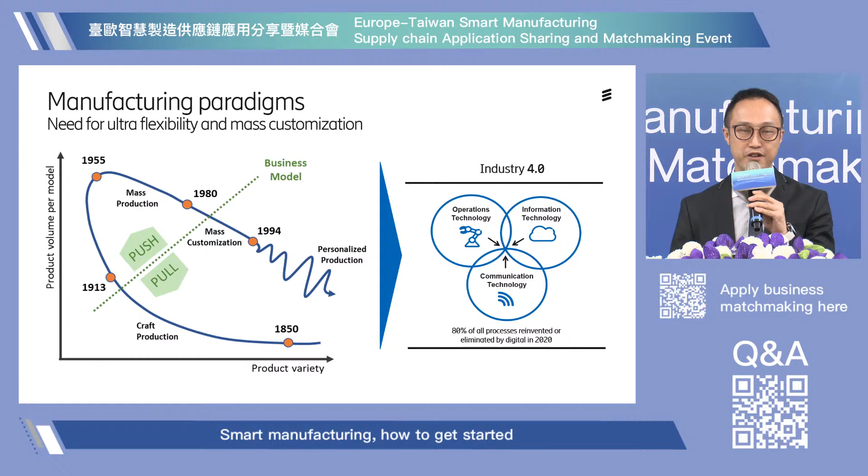And it's because there are a lot of applications in the factory that will embrace a more flexible way to deploy the solution or application. So wireless is the key.

And when we look into a lot of study within Ericsson, and also our experience with more than 60 references across the world, we find quite a number of applications that manufacturers will consider to use. We can categorize that into 5 different use cases that manufacturers are most interested in.

First of all is asset tracking, which the factory would like to use to track, for example, their material, their partially completed products, and also the finished product - where they go and how is the performance. Because when they know about the performance of the network, they know how to improve it.

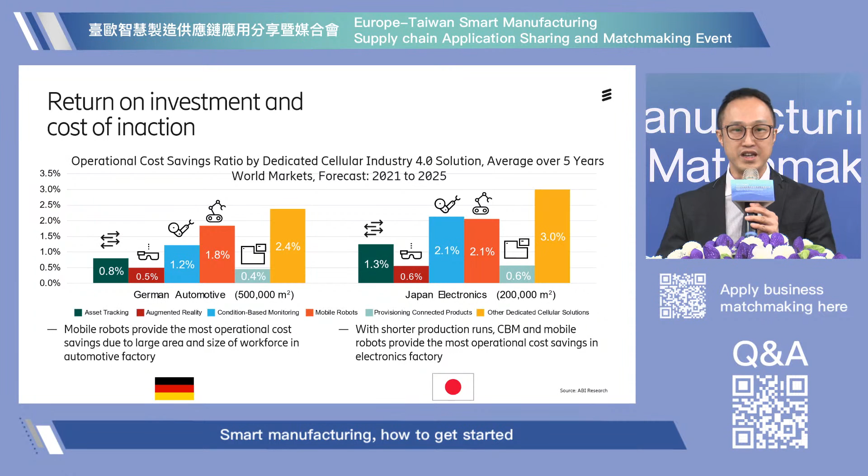In this chart, we can see the similarities and the differences. Of course, the numbers are different, but the similarity is in which applications generate the most savings in the factory. You can see robotics and condition-based monitoring generate the most savings over those 5 years of operation. Let's go into more detail on the calculation.

When you look at the investment part, the total cost of ownership for the cellular investment is around 50 million US dollars. But it generates more than 500 million US dollars in savings over those 5 years, so it will increase the margin by 4.58%. We can also compare with doing nothing. If they do nothing, over those 5 years it will impact 17,500 vehicles, and it will generate a 495 million loss in their factory.

When you look at the Japan case, you can find a similar situation. They invest 26 million US dollars in the cellular system, and they generate more than $600 million in savings. If they don't do it, they will lose $636 million over 5 years. It improved the margin from 15% to 22%. It's just a huge improvement.

When we look at the ROI for these two companies in 5 years, we can see almost 10 times to 20 times over 5 years. So actually, they have a lot of similarity.

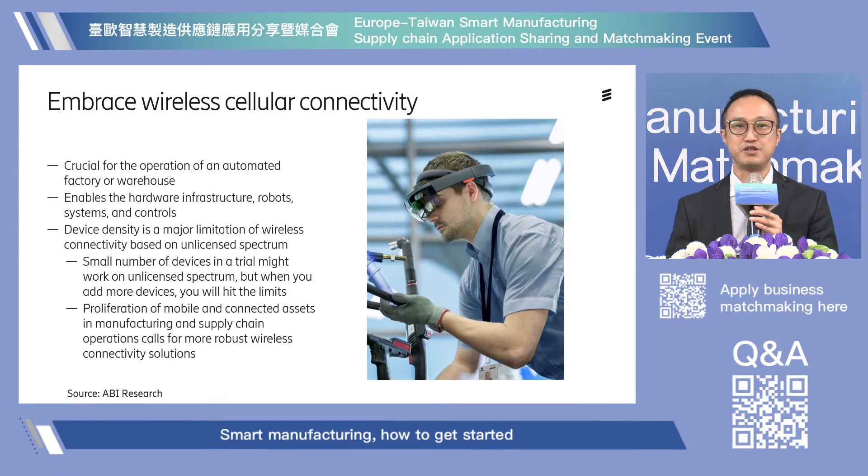A cellular system is born with security, with massive connectivity, and with very stable performance and handover, for example in mobility management. These are all major factors that help the factory operate better and reduce losses from interference and attacks from outside hackers. And of course, the mobile network uses licensed spectrum, unlike other technologies that use unlicensed spectrum, so we are free from interference from others. That's why the mobile network, or the cellular solution, is the key.

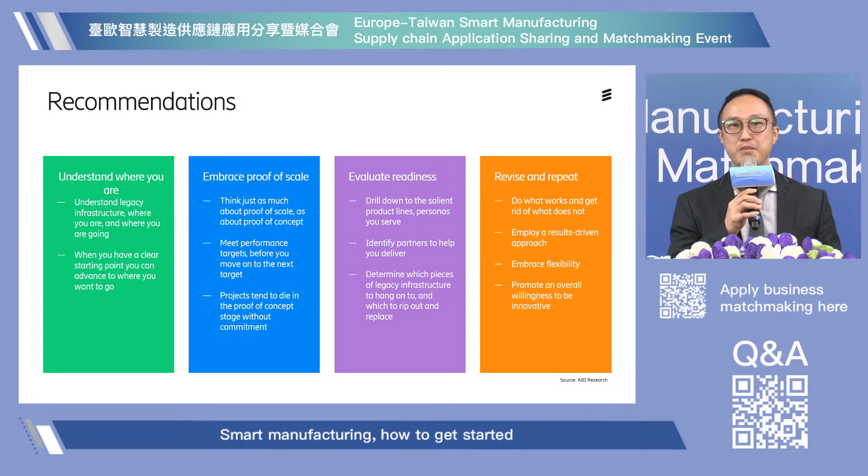And finally, you have to evaluate, are you ready for that? For example, maybe some of the equipment is too old and you have to replace it, then you need a plan to replace it. And maybe some of the work processes are too old, then you may need to educate your staff to see if there is anything to change, to adapt to the new changes. Finally, be more flexible, review it progressively to find out the best way of using those technologies to help your process.

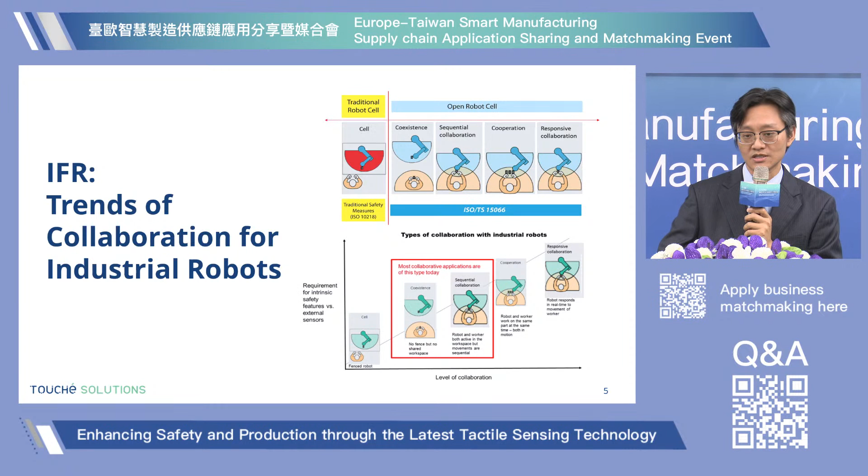So when we talk about safety from the ISO standard point of view, in ISO 10218 and ISO/TS 15066, there are 4 standard modes for the human-robot collaboration scenario: the safety-rated stop, the speed and separation monitoring feature, the hand guiding feature, and the power and force limiting feature.

But if you look at all 4 kinds of co-work scenarios, from coexistence to collaboration, the most essential safeguarding feature still remains contact and collision protection, which means the power and force limiting function is still the critical one. So what is power and force limiting?

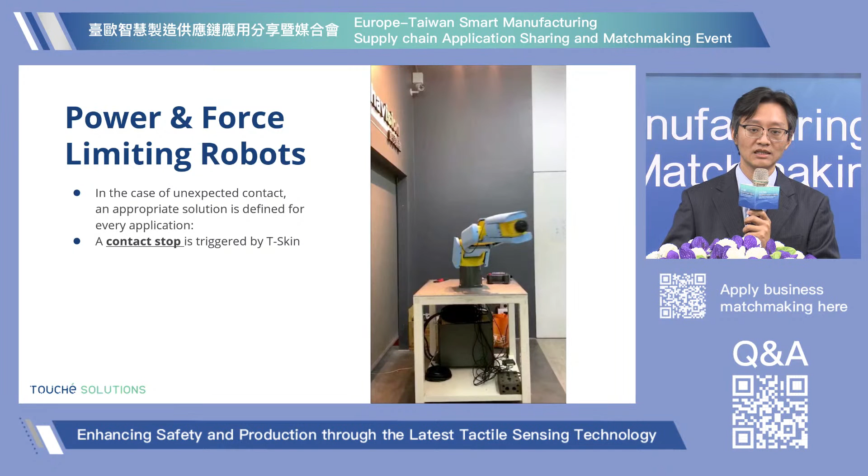Let me check the video. Does it work? Okay.

In the case of unexpected contact, a proper protection sensing solution can make the contact safe and not hurt people. So it can be triggered by Touché Solutions' T-Skin. As you can see, the skin is very sensitive and very reliable.

Sorry, I did not. Okay.

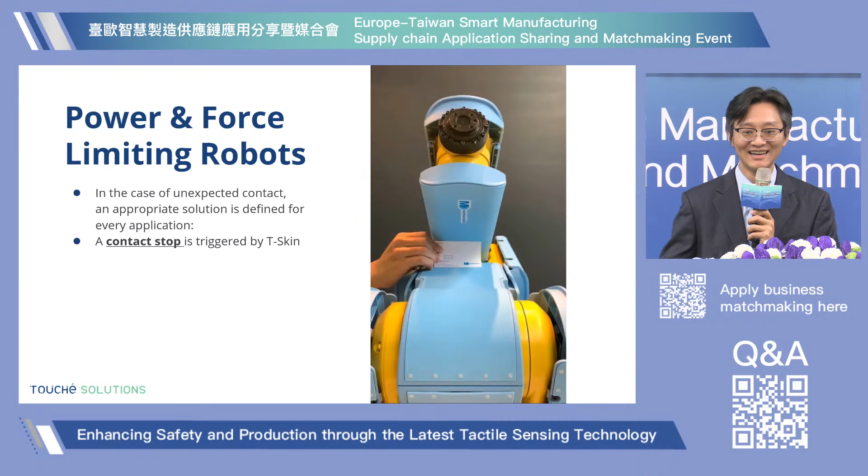Okay. If we combine it with other area sensor solutions to provide the reduced robot speed function, then the robot can change its working speed from high speed to safety speed, and it can reduce the risk of injuries.

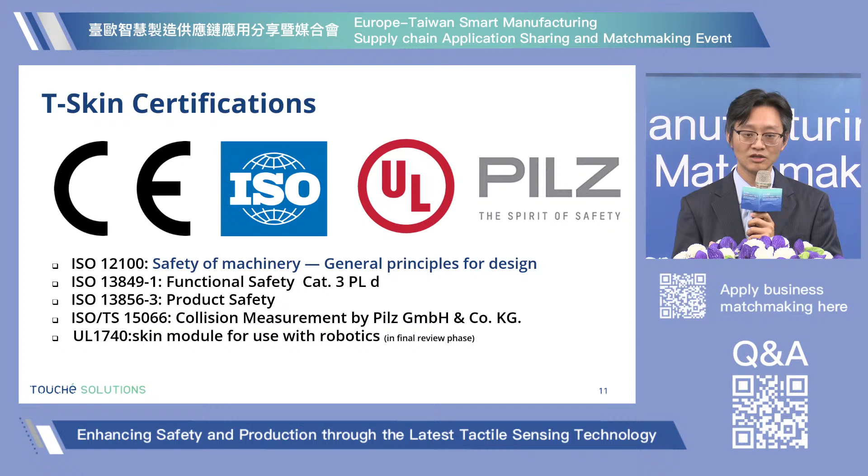Okay, here is a brief movie about the collision measurement. We co-work with Pilz to provide the collision measurement report, and here is how it tests. All the collisions will be checked and verified, the force and the pressure of each collision. So all the robot performance with the T-skin can be guaranteed.

The collision force is far under the limitation of the ISO 15066 requirement. Okay, so it can make sure all contact or all collisions are safe for humans.

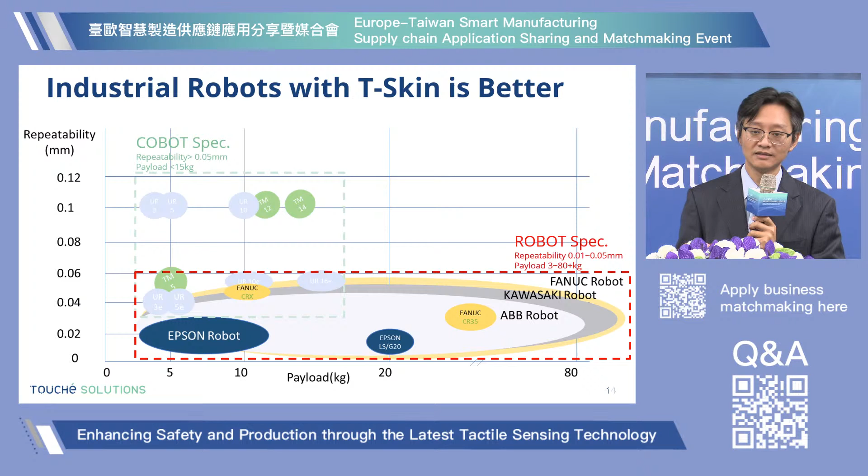Okay, then when we come back to current cobot specs, we can find from the repeatability and payload point of view, only a few cobots can provide this function. But compared to that, existing industrial robots have a higher payload and more accurate repeatability. So we think industrial robots with T-skin can provide more application benefit for automation. Okay, so from this point of view, the industrial cobot can become like this.

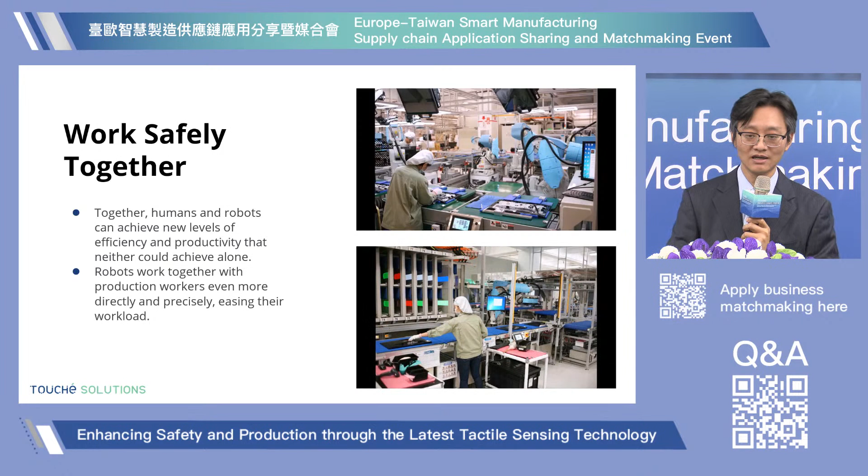Okay. For example, the robot will take the repetitive task, and all the contact scenarios are protected by our blue T-skin. And in the next video, okay, if you get closer, the robot can reduce its speed. In case of contact, the robot will stop immediately. So it provides a safe working-together environment. Okay.

Let's move to the next page. Okay. Through this kind of combination, I think we can simplify the layout of the current production line from conventional safety precautions to an open environment. So the space saving will be up to 50% or even more, and the layout can reduce the cost required by cages or other fences. Okay, and without the fences, the layout of the robot and the human can become more flexible. So flexibility of automation will become more and more important in the post-COVID-19 era.

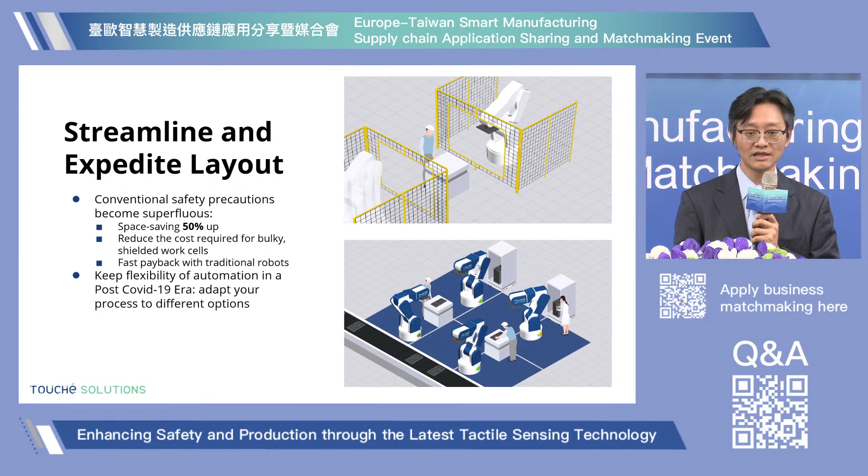So I think with this safety feature, the robot, the automation equipment and the worker can be safely laid out in the same space. Okay. Let's move to the next.

Meanwhile, without the fence, an open environment can run smoothly for the robot cycle time. This is a comparison between a fenced and a fenceless operation. You can see from the middle video, inside the fence, the robots are limited in their motion trajectory. So the cycle time will take about 2.9 seconds.

But with the fenceless environment, the robot can do the joint motion. So the cycle time will reduce to 1.2 seconds. So it will increase the productivity up to 60 percent. Okay. Sorry for the video, it doesn't work. Okay. Let's move to the next page.

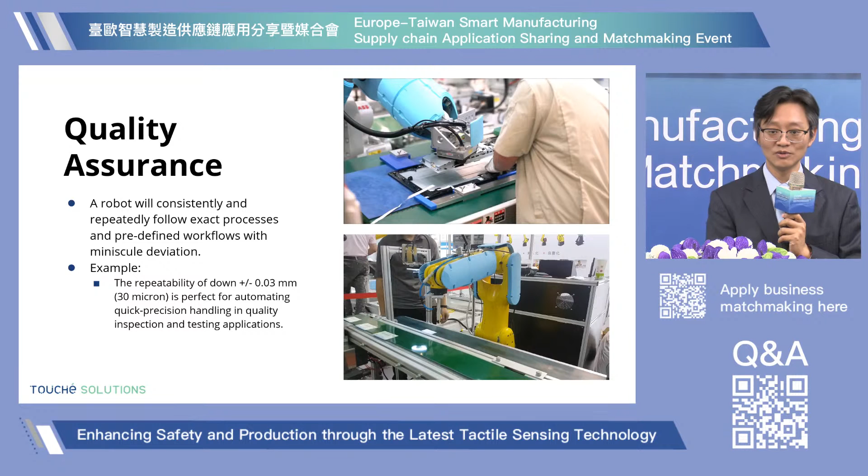Okay. Because we upgraded the industrial robots, the industrial robot can provide quality assurance. So for example, for the pick and place application, the traditional industrial robot can provide 0.03 millimeter accuracy, which is very precise and great for real automation applications. Okay, let's move to the next page. Okay, sorry.

Okay. Also, industrial robots have longer reach and higher payload. So for loading and unloading tasks, the robot can create a healthier workstation, good for humans. For example, for overhead work or repetitive heavy tasks, the robot can take the task, and the worker can check and verify separately.

So in Kista's real case, they reduced from 2 human operators to an HRC scenario. One operator co-works with one industrial robot, and the productivity increased about 55%, and it also saves up to 43% of space. Okay, so

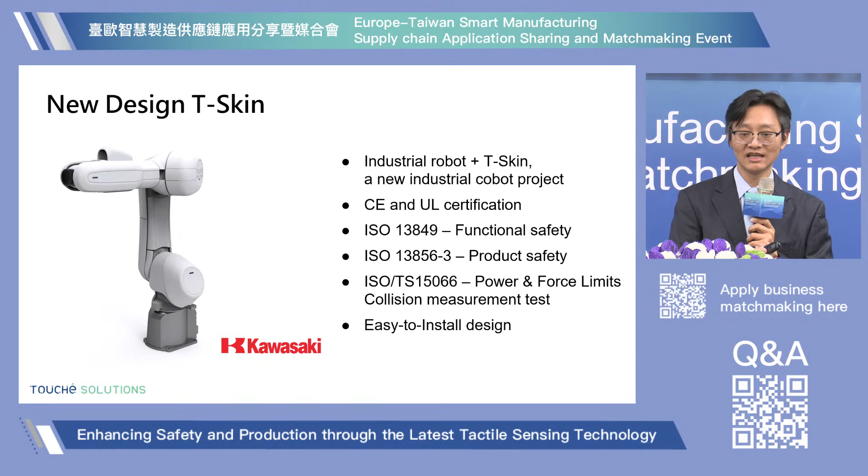in the next page, I would like to introduce our new concept of T-skin. It co-works with Kawasaki robots. We have full coverage and a lightweight design for their industrial robot. It can cover the contact area from different angles and all the hazard positions. We also got all the certifications, and this new design will be launched at the end of this year. It will go worldwide very soon.

Okay, now we have a lot of great partners from ABB to Denso, Epson, Fanuc, Kawasaki, Kuka, Mitsubishi, and Yamaha. And that's all my presentation here today.

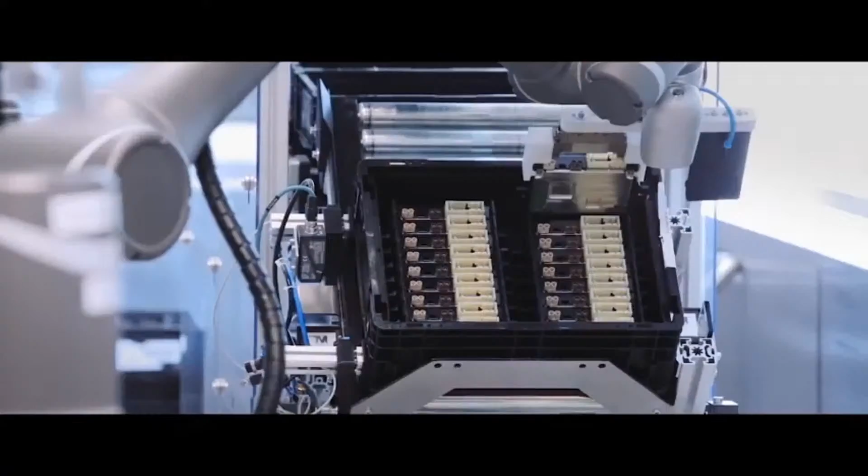In the video, you may see some little squares, like this one, and we call it the TM Landmark. It's a major trick of our robot. In the old way to teach a robot, you record all the points the robot should go to in robot space, in a robot coordinate system. So if the spatial relationship between the robot and your environment changes, you need to reteach all the points again.

But if you use this TM Landmark and use our camera to see this landmark, it creates a virtual coordinate system on the landmark. And then you can record all the points on this landmark. It means even if your robot and the working space changed, someone moved it, you just use the camera to watch this TM Landmark again. All the points are updated. You don't need to reteach it.

This is a testing station on this production line. The robot picks one electronic device and puts it into each testing machine. Let's give you an example.

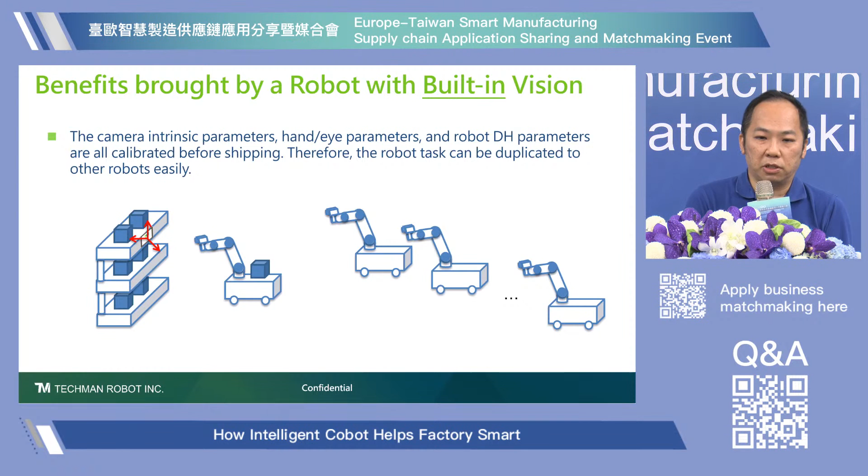In the past, our customers used our robot for pick and place, for loading and unloading, for assembly. But more and more customers are asking us, can we use TechMan robot for quality control, for inspection? Because our robot has a camera, and the robot can carry the camera to check the product from different views.

So of course we can do quality control, but with old machine vision technology, to do quality control you need to set up a lot of rules to define what's okay and what's NG. When the rules get more and more, the task gets complex.

But AI technology has made great improvement in recent years, especially deep learning technology. You can use AI for classification, for object detection, for segmentation to find tiny defects, or even if you don't have any NG sample, just use OK samples to train a model and use it to find anomalies.

So TechMan, this year, just released our AI solution. We have new software and hardware. You can build your own AI training server in your factory.

You don't need to send your image to the cloud because it may leak some important information about your factory. You can just use our solution, and our solution has a very friendly user interface.

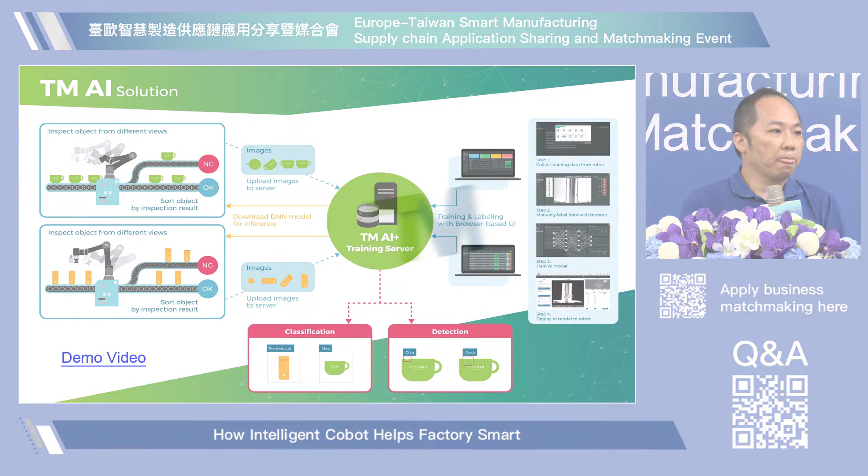In recent years, AI technique has shown great improvement on robotics vision. However, AI is task-oriented and data-driven technology that requires the use of a computer to model and replicate intelligent behavior. Users need an easy-to-use tool to train and deploy their own AI model using their own dataset in order to solve tasks.

Hi, I am Jesse Wu, the factory manager of Techman Robot. In recent equipment updates, we applied TM AI Plus into our TM robot production process in the control box wire assembly station.

Before we introduced TM AI Plus, all wires were assembled by human workers. Due to the difference between individuals, it's hard to standardize the assembly process, and this generated occasional assembly errors, which might cause damage to the power supply of the control box and create extra costs.

The TM AI Plus solution contains a physical server installed with TM AI Plus training software and TM AI Plus inference functions performed by a robot controller.

Users can build and train an AI model and deploy the model to robot arms. It's an end-to-end solution that integrates everything to minimize user effort. Let's take a closer look at how this solution works.

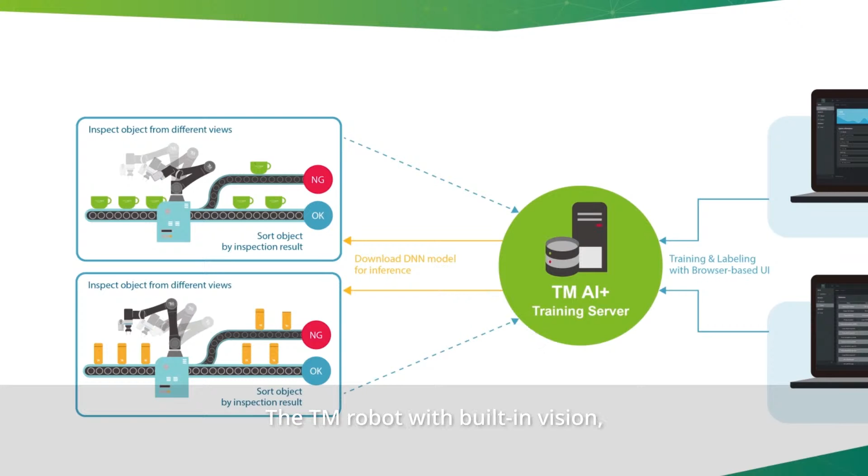The TM robot with built-in vision can automatically collect image data while working. These images will be used as a sample dataset and then uploaded to the TM AI Plus training server. TM AI Plus training server is a browser-based software which allows multiple users access at the same time. Users can process and label the image samples collected from the robots.

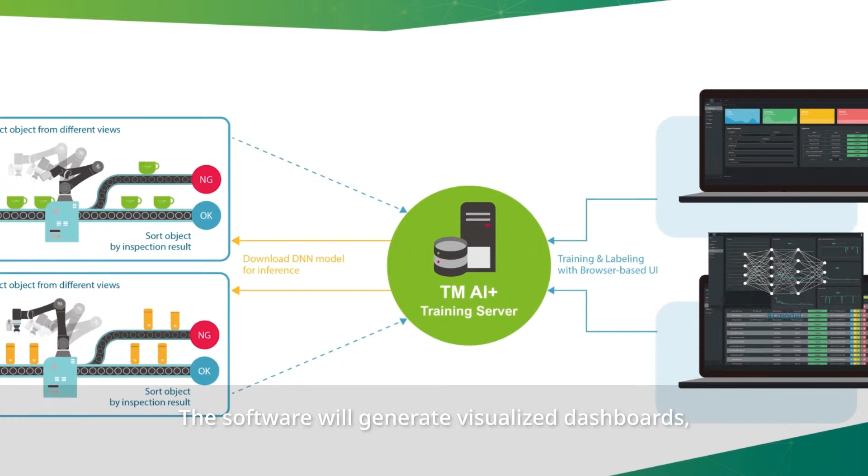After labeling the samples, AI models will be trained using these samples. The software will generate visualized dashboards and provide simulation functions for users to evaluate the training results and see if they meet their expectations. Once expectations are met, users can download the trained models to the robot and perform inference in the tasks.

Now the robot arms are capable of performing tasks such as object classification and object detection. With different labels being assigned to the image data, the AI model will be trained according to these labels and enable the robot arm to perform object classification.

Detection function is highly recommended for quality inspecting. It can be used to detect defects appearing on products. It can also be used in OCR applications.

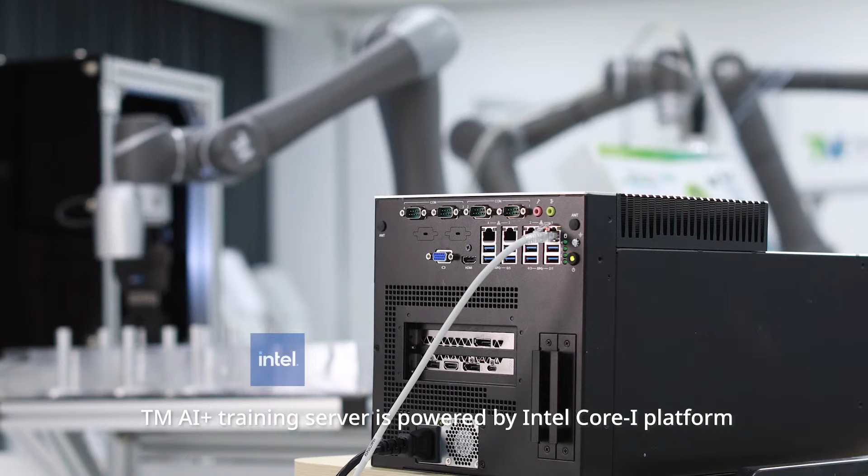TM AI Plus training server is powered by Intel Core i platform and leverages Intel Edge Insights for Industrial software to facilitate training work and optimize user experience. The robot arm is powered by the Intel Core i platform with the OpenVINO toolkit to optimize inference performance of the AI model as well as system cost structure.

An easy-to-use graphical interface guides users to perform image annotation and AI model training directly. The need for AI knowledge or skill is minimal. The dataset management view shows an image gallery for each label. All the images for annotation and training are organized with proper visualization.

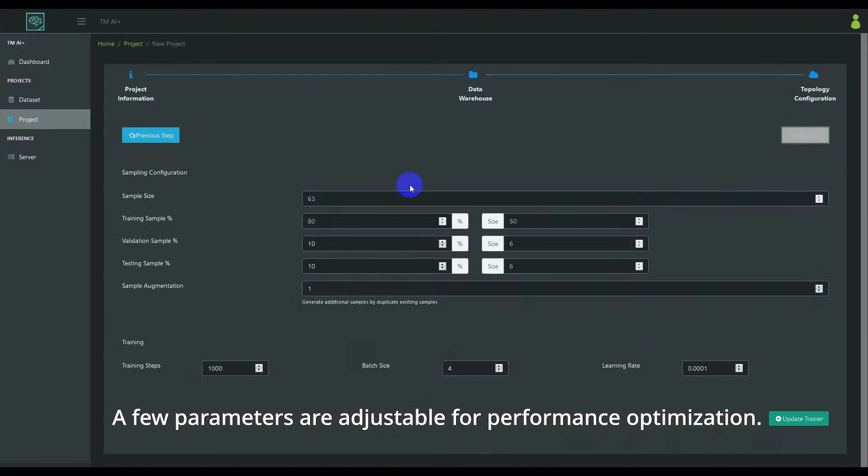Different AI models, such as classification or object detection, can be chosen to fit different applications. A few parameters are adjustable for performance optimization, and then just one click starts the whole training process. The training process usually takes a couple of minutes to a few hours.

When the training process is completed, the training trend and performance metrics such as precision, recall, and F1 score are visualized with a clear chart and table. It helps the user understand whether the dataset can be interpreted by the trained AI model.

The AI model can be tested on the images in the dataset or on new images uploaded by the browser. Clicking the thumbnail image to see the prediction result confirms the model works well with different images. Finally, all the robots connected to this training server can download this model and then start working with AI-powered visual function. TM AI Plus is a total solution from AI model training, deploying, to inferencing.

After introducing TM AI Plus, we let TM AI Plus handle the quality inspection task. It can 100% check all of the wires and alarm the workers if there's an error. While inspecting, it also automatically records the inspection data for each control box. Overall, it enhances the yield of the station and reduces costs that used to be generated from component damage.

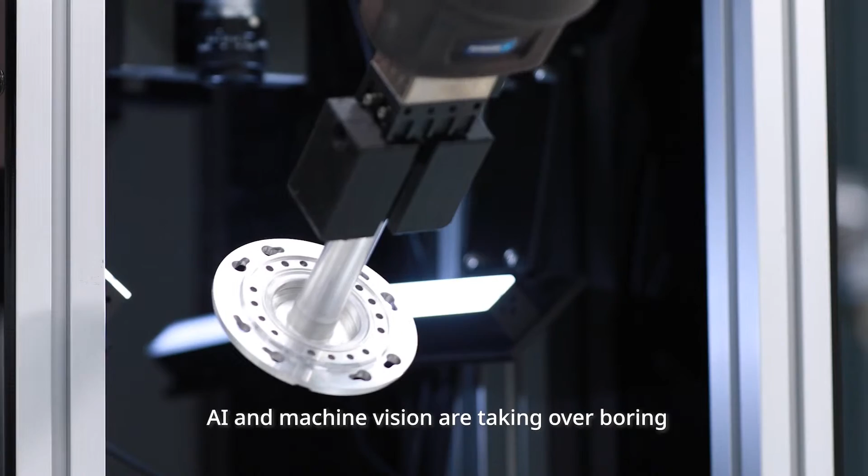AI and machine vision are taking over boring and complex tasks like inspections. TM AI Plus solution is the industry's first integration of traditional machine and advanced AI vision in a single robotic system.

This lets workers focus on more sophisticated tasks. Machine vision and deep learning will also be an integral part of Industry 4.0 as manufacturers look for new levels of efficiency and productivity.

Next, I will show you some examples of using the AI. First is the same case in the video you just saw, where we use AI to check if the wire is connected to the right pin for power supply.

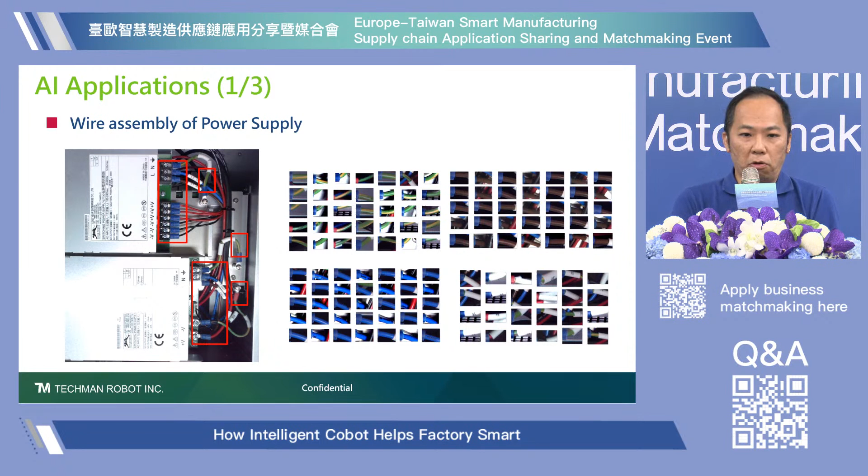Next, I want to use these slides to conclude today's talk. Techman Robot, we provide a total solution for your robot and your robot with vision.

All the software of the robot control and vision, including 2D vision or 3D vision, and even AI, are integrated in the same software and put them in the same controller.

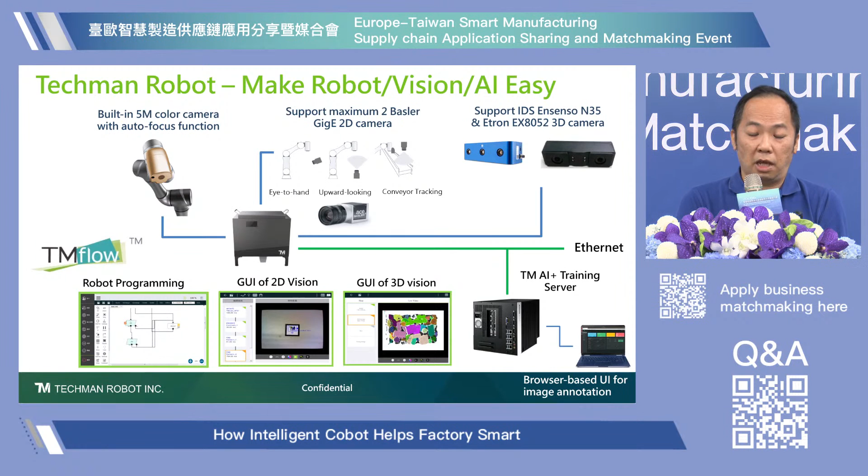So you don't need to worry about how to do the calibration, how to communicate between your robot and your vision solution, or how to apply AI to your system. All of them are integrated together with a very simple, easy to use software. We believe we reduce the learning curve of robot teaching and vision, and we can help you improve your performance and save time setting up an automation line.

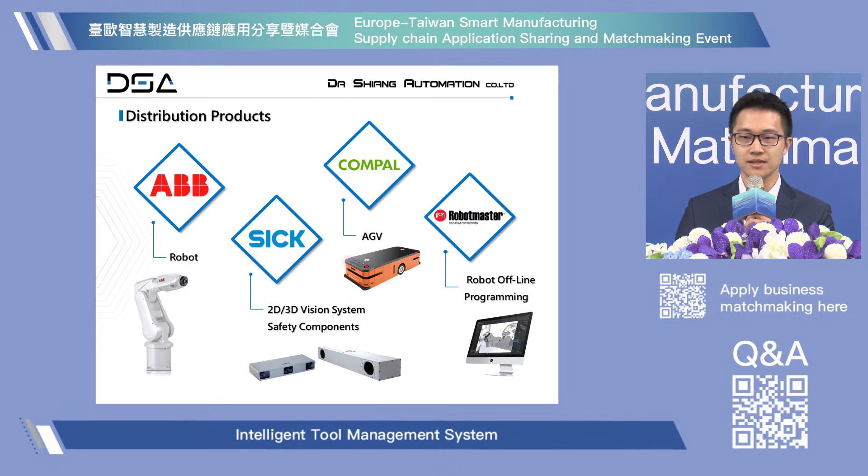You may be aware that Da Shiang Automation is one of the leaders in Taiwan when it comes to investment casting, die casting, and machine automation. Da Shiang Automation has formed close relationships with the following companies: ABB, who supplies robot arms; SICK, who provides 2D and 3D vision systems and safety components; Compal Electronics, that offers AGVs; and lastly, RobotMaster, who markets robot offline programming.

I want to further introduce Da Shiang Automation to all of you with the help of a video. The content in the video will be in Mandarin and English. Let's take a look.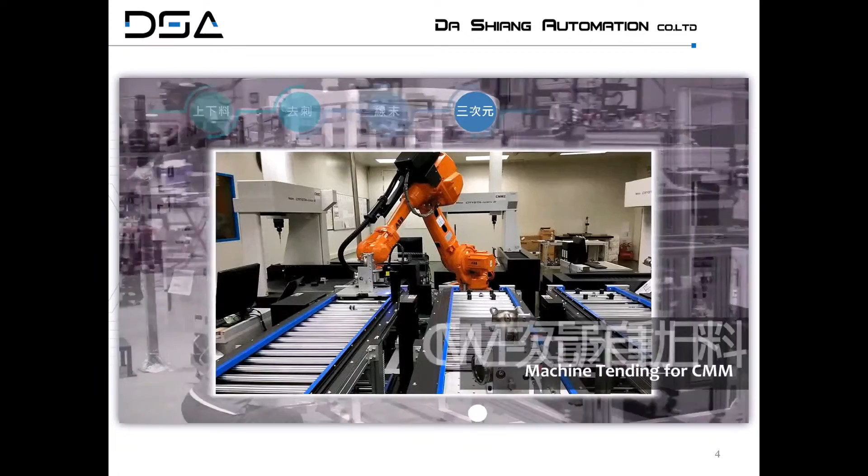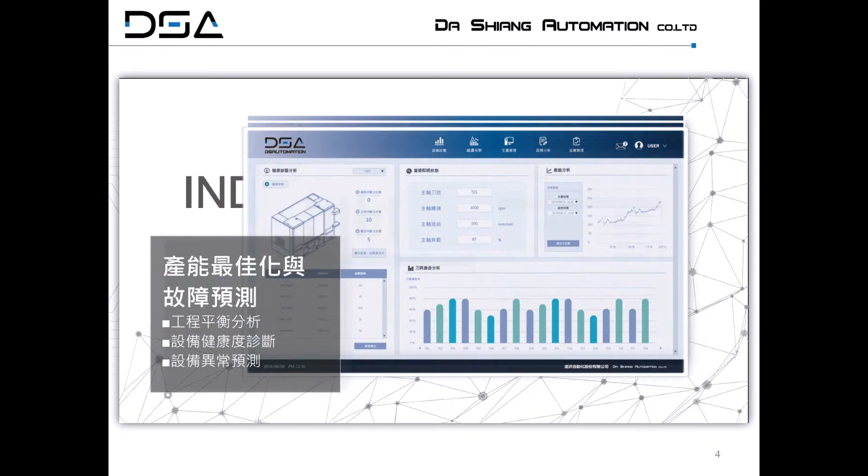We also provide a website user interface, like productivity quality management, energy efficiency optimizations, productivity optimizations and downtime predictions, downtime statistics and solving experience record, product scheduling optimizations, and information layer management.

Da Shiang Automation is Meida Group's subsidiary, and Da Shiang is located in Taiwan. We also have offices in Tianjin, China, Ho Chi Minh City in Vietnam, Serbia, and France.

Currently in the industry, everyone is talking about tool data management. How can we at Da Shiang Automation help your company process run more friendly? Let's watch how Da Shiang will make it possible for you. The following three videos will take about 7 minutes. The first video will explain why we need tool data management.

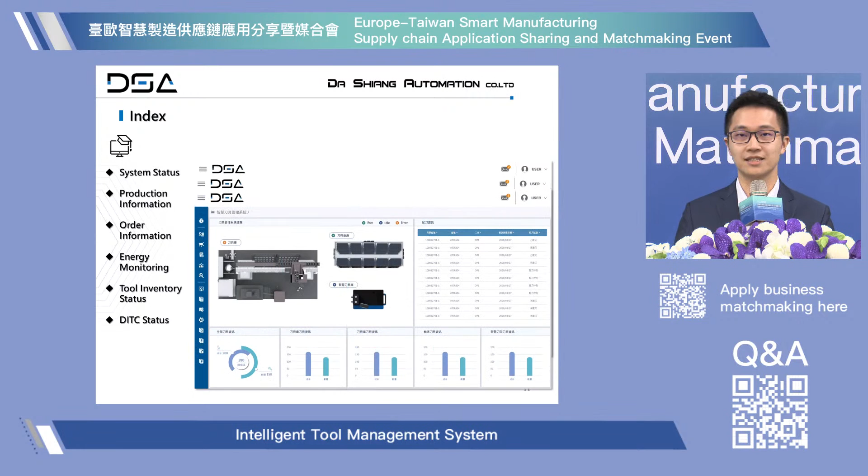The product includes a software user interface that provides the following details: system status, production information, order information, energy monitoring, tool inventory status, and DITC status. Some additional information that can be found in the system is tool warehouse status, DITC warehouse status, tool magazine status, and tool buffer rack status.

Also, Da Shiang uses a tool setter in the CNC machine for precise measurement. More functions include tool inventory status and tool searches. This is what tool configuration setup and machining tool configuration status, and DITC tool configuration status look like.

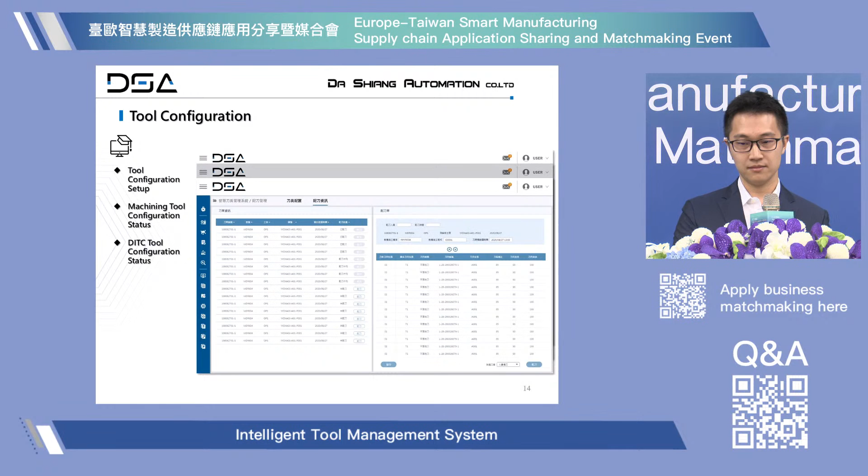Every company that invests in an ERP system, if they want to improve their performance, will also have to consider automation. So firstly, they will use SMB to collect data for the SCADA system to monitor and analyze the real-time information. The DSA Intelligent Tool Management System can be combined with the MES and APS system for improved performance and production line efficiency.

And looking at the smart manufacturing systems structure, automatic factories will have their data collected on each CNC machine via SMB, PLC, or DCS through Wi-Fi or Ethernet cable. The HA server will collect, analyze, and integrate available data. The HA server will also provide stability and control the on-set status of data. Users will be able to plan and control processes, and managers to obtain key information through real-time monitoring.

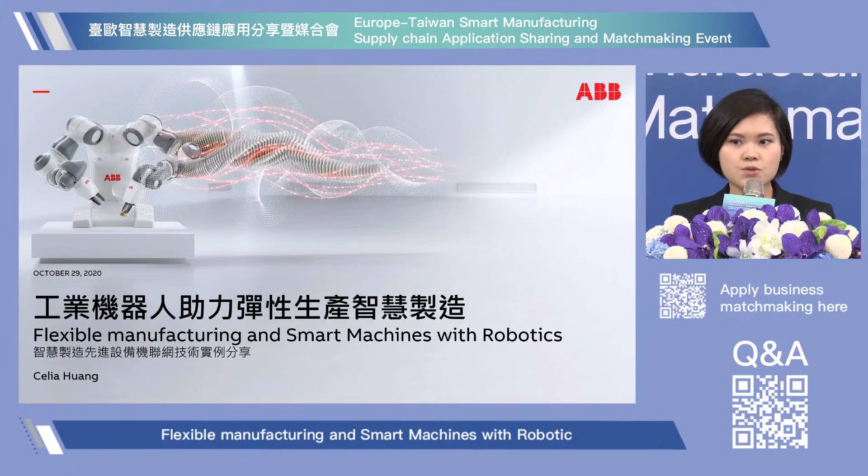Today's webinar will focus on some real cases to tell you how ABB robotics is applied to real manufacturing processes across industry. Before we start, I would like to share how we are helping our customers deal with opportunities and challenges.

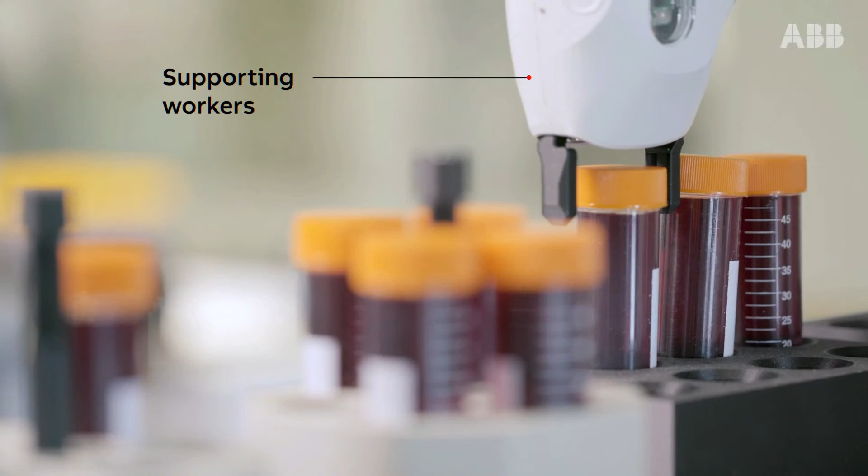For those who don't know who ABB is, ABB Group was established in 1988 by ASEA from Sweden and BBC from Switzerland, with headquarters in Zurich, Switzerland. ABB Robotics has over 30 years of experience in developing and deploying robotic solutions, wishing to assist manufacturers with flexible manufacturing and smart machines. In this video, you can see how we are helping customers deal with the opportunities. And you can see how YuMi is helping customers in the medical sector.

In the next slide, I will show you what makes ABB robotics different. At ABB Robotics, we push the boundaries of technology to energize and transform the industry in which we operate. We have seen an acceleration of 3 key megatrends that assist manufacturers with flexible manufacturing and smart machines. As you can see, simplification, collaboration, and digitalization are fundamentally changing the face of manufacturing and create a sustainable future. For that, ABB is launching something really exciting.

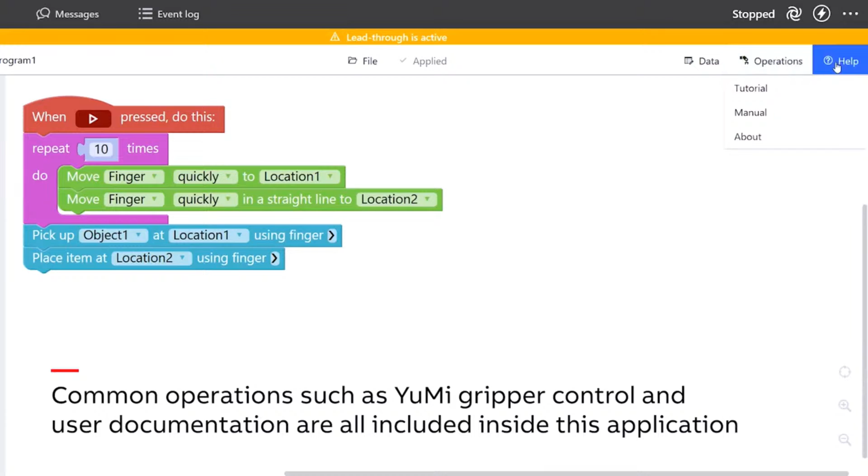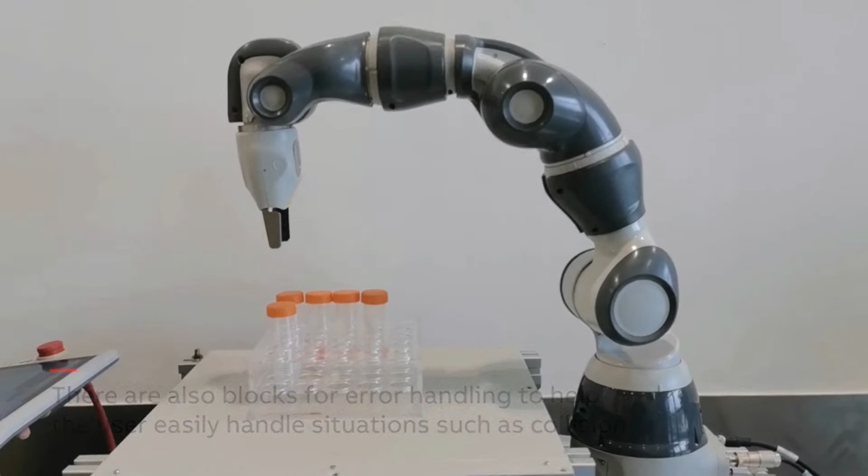Where automation is being introduced to assist manual-based processes in industry, there is always an additional need to keep personnel safe while maximizing the opportunities to collaborate. As you can see, this is how we focus on human-robot collaboration. YuMi helps to improve the overall application functionality, which is ideal for small part assembling and yet extremely accurate and safe. ABB SafeMove 2 performs the safety certified monitoring of the robot motion, tool, sensor supervision, as well as the speed limitation. It transforms any connected robot with higher payload and faster speed into a collaborative one. Moreover, it gains a high-performance touch system, enabling users to collaborate with the robot.

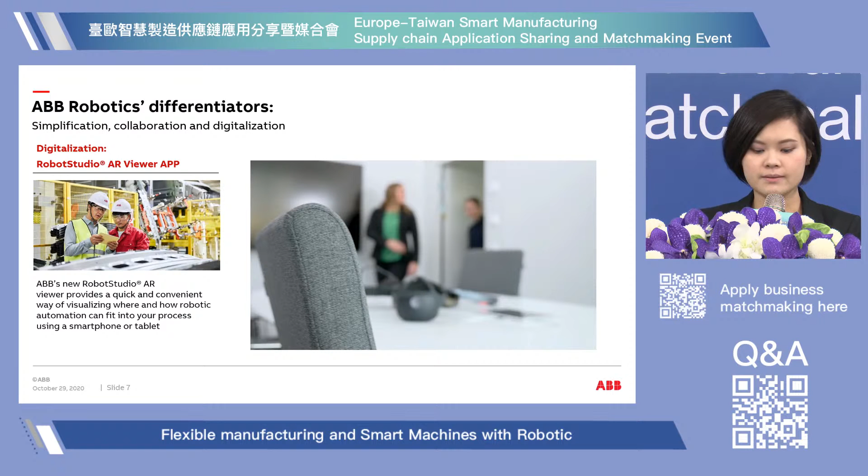Well, we've talked about simplification, collaboration, and digitalization. Would you already want to see how the robot is working in your environment? Now, let's imagine that you're in the office. ABB's RobotStudio AR Viewer app can test any robot created in RobotStudio, enabling users to get the size and scale of a robot or robot cells and how it can be deployed on the factory floor to fit around any existing equipment. With AR technologies, the app overlays the model solution in a real-life production environment with the ability to scale it to full size and rotate it through a variety of angles to achieve the best result.

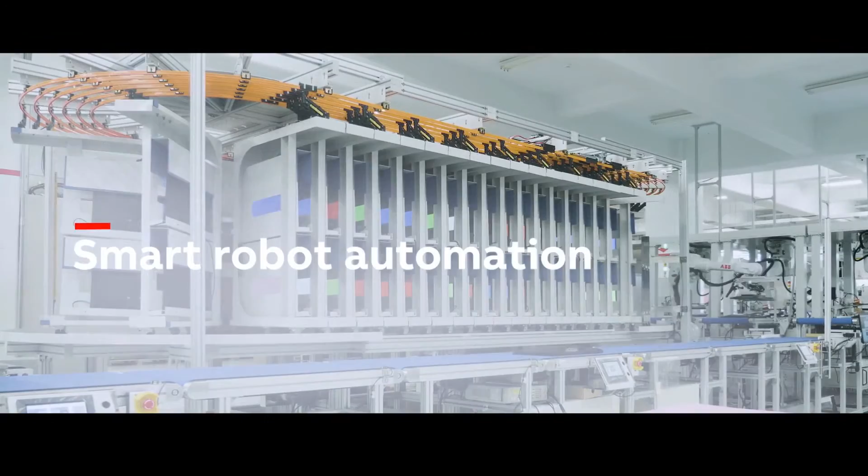Alright, it's time to show you some real cases. In this case, you'll see ABB cooperates with Qisda with robotic solutions for the production line. Our robots are working in assembling and testing lines with the workers. As a result of bringing ABB's robots on board, Qisda has reduced low-skill manual tasks by 51% and enhanced the management of manufacturing productivity by 74%. Occupational injury rates have been greatly reduced, and the production per unit area has boosted by 52%.

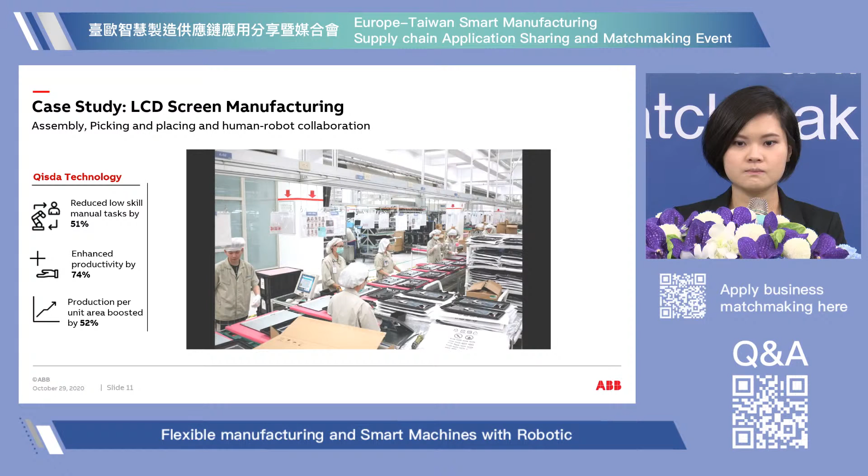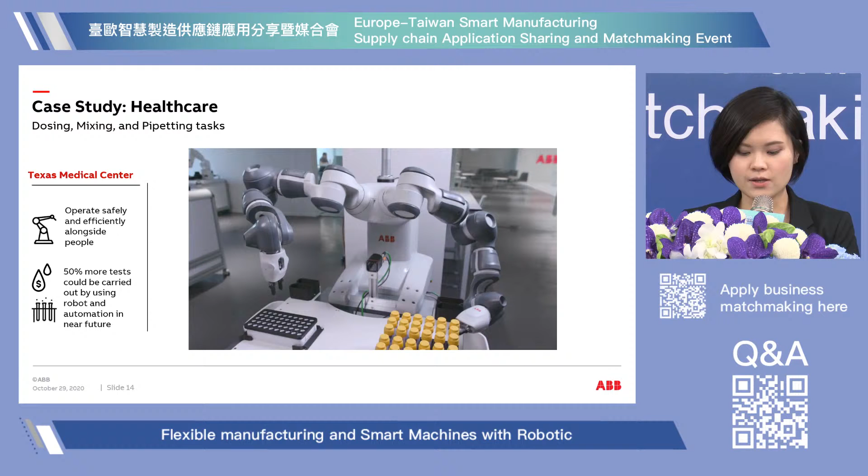And in the last case, you'll see ABB cooperates with Texas Medical Center to develop automatic healthcare solutions. We are jointly researching robots, automatic systems, labs, and pharmacies to drive technological innovation. All right, let's hear some voices from the customer.

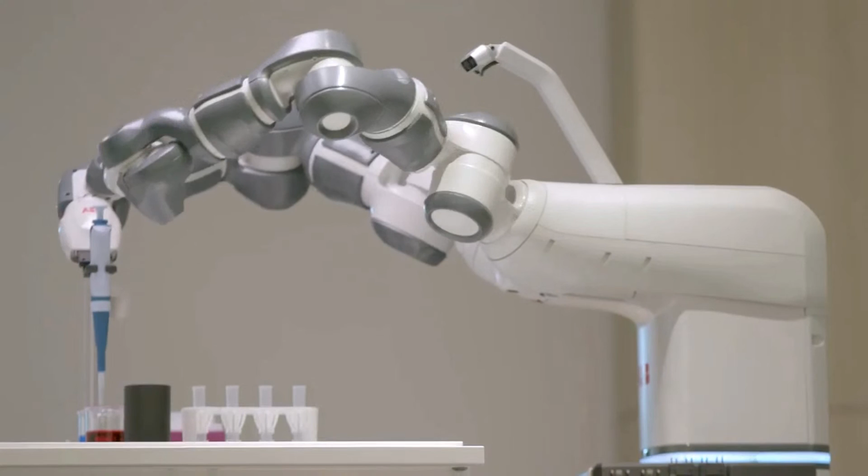The largest medical hub in the world just got even more state-of-the-art. The Texas Medical Center in Houston treats 10 million patients a year and is at the forefront of life science innovation. And now it's also home to ABB's first global healthcare research hub, bringing the power of robotics and automation to medicine. Together with ABB, we envisioned a whole new world where we could use robotics as the core for our innovation in our labs, in the way that our hospitals work, in the logistics, in the way that we refine the processes in healthcare. Healthcare's changing dramatically. We have shortages of people, we have shortages of talent, and ABB Robotics is bringing that technology and putting it right at the center of all the innovation at the medical center. Among the concepts being demonstrated here are collaborative robots which can work with centrifuges, in test tube handling, and even navigate autonomously around the labs and among their human co-workers.

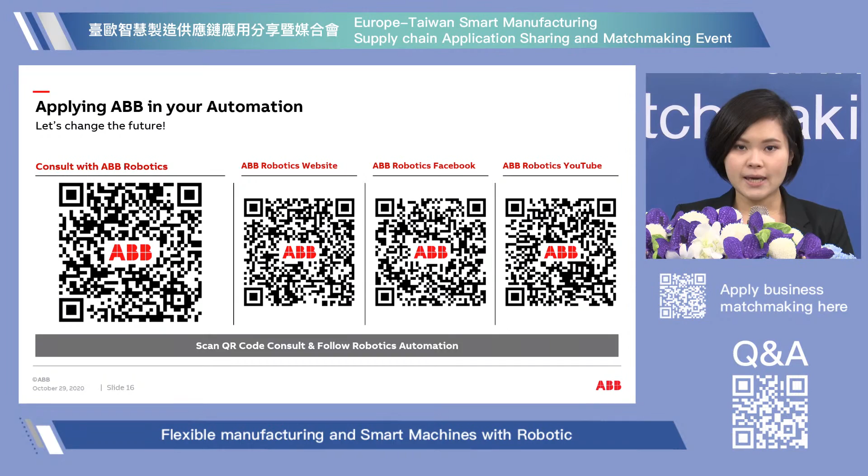Alright, automation has never been easier than it is right now. Flexible manufacturing and smart machines with robotics may seem like a trend to you, but you shouldn't just dismiss it. Whatever your preferences or budget are, there is always going to be something out there for you. There are just 4 steps to get your factory automated, whatever level you would like to take it to. If you're serious about robotic automation solutions, approaching ABB is more than just a good idea. Well, I hope that we have excited and inspired you about the huge potential there is in robotics and automation. Applying ABB in your automation, let's change the future.

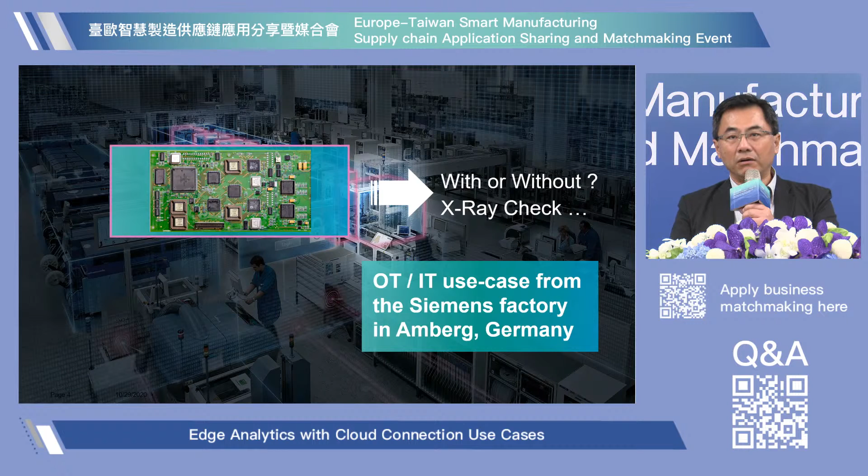The first case I would like to share with you is a use case from a Siemens Amberg factory, with or without X-ray check. A PCB board manufacturing line, from component insertion and also image quality check with soldering machines. By collecting the historical data, we train the AI model in the cloud and push the application into the edge device, then gather in real time more than approximately 40,000 data sets for real-time calculation in the edge device, to decide whether batches of production need to go through the X-ray check or not.

The next case I would like to share with you is also after the SMT line, as in the reference case I just mentioned in the previous use case: a PCB cutting machine. Cutting the PCB board from multiple sections into separate pieces, you need a spindle to cut the PCB board, also routing the cutting path.

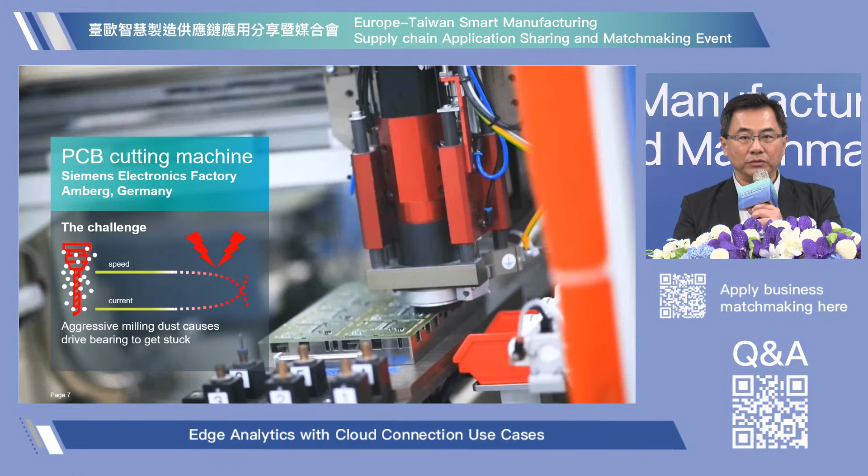When the cutting process is ongoing, it generates powder, and it gets stuck onto the spindle. Then the drive system, in order to overcome the resistance, starts to generate more current into the motor. When the current increases, the temperature also increases. On the other hand, with more temperature, the speed gets slower because the drive cannot afford it. So after a certain period of time, you will definitely find the machine broken. The spindle is not working anymore, and your workpieces are still lying on the machining bed.

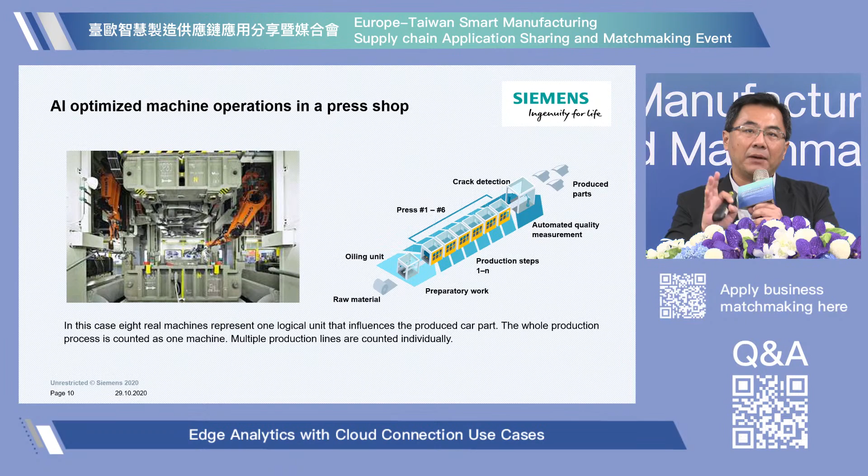The next case I would like to share with you is one of our customers in Germany. It's a press line. This press line integrates 8 machines into the edge device. The edge device uses the AI-trained model to identify environment variations and do real-time optimization of the operation parameters. The main challenge in this press line production is that the quality rate cannot always be maintained at the same level due to environment variations. Also, the operators may change over time, so they cannot keep transferring their knowledge to newcomers.

So therefore, there's always an issue for this production line. The quality varies in different periods of time. The solution to that is connecting those 8 machines by implementing the pre-trained model in the cloud system, connected with the expert knowledge base in the cloud, then getting the real-time press line information via edge device.

Pre-processed data will be transferred from the edge device, with a limited quantity of data, into the cloud system to make a judgment and inform the on-site operator that something might go wrong. So therefore, they have a couple hours in advance to get an alert to change the operation parameters to avoid the quality getting lower and lower.

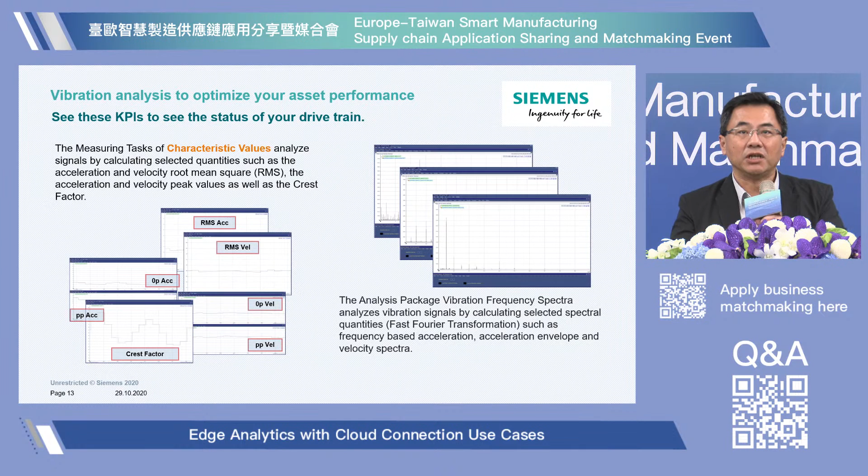However, for the remote global business, it's very difficult to identify the problem by asking over the telephone. So therefore, they are using cloud connection technology to connect all their machines around the world from the customer side to their central service department. When a certain failure pattern is identified, they can call their customer in advance: hey, customer, your machine might go down a couple hours later. Just do something to avoid the downtime.